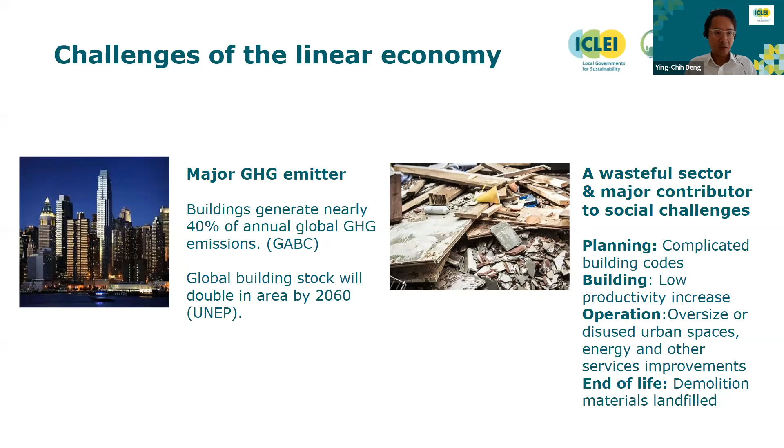So I would like to start with the challenges here. In relationship to the challenges we have observed, linear economy in the building sector follows a take, make, waste model. Resources are extracted from the environment, taken, used as disposable products, made, and discarded after their use periods, wasted. Linear economies are found to be linked to a range of negative impacts in cities, including rising carbon emissions, biodiversity loss, and waste management challenges.

The Circular City Action Framework was hence developed to introduce cities to a range of strategies and actions for circular transition at the local level. The action framework provides local governments with a 5R strategy and 15 linked actions.

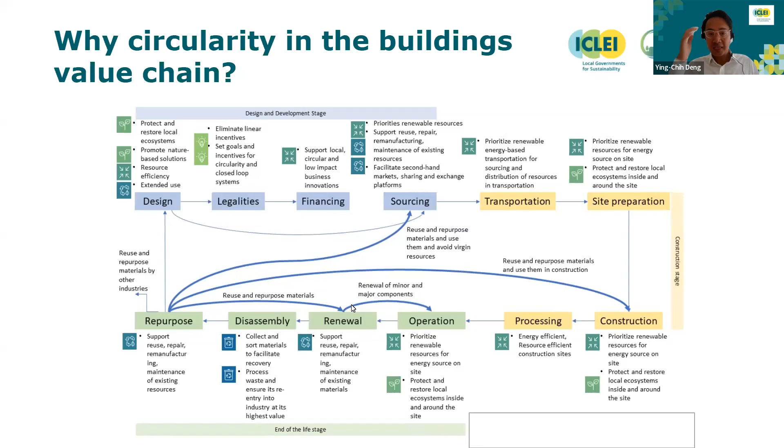Thank you so much, Ying-Chih, and thank you to the ICLEI team for having me today. My name is Katrina Brady. I'm Director of Strategy and Development at the World Green Building Council, talking to you today from London in the UK.

Thank you so much for those opening remarks. I will build on those, and it was fantastic to see details about the Circular City Action Framework. I was actually screenshotting it and sending it to my colleagues while you were speaking, Ying-Chih. That's a fantastic introduction.

I'll begin by introducing the World Green Building Council, who are, as you've heard, a global network of networks. We represent the 70 national green building councils around the world and their 36,000 members. Collectively, with our green building councils, we work to advance the ambition of the UN Sustainable Development Goals, the Paris Agreement, and to accelerate the critical systems transition that we need for sustainability at building, infrastructure, and city scale.

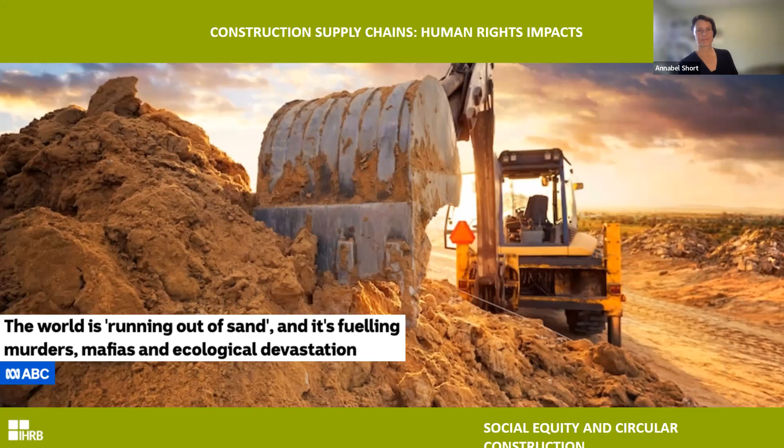And then when we think about wood and forestry, to elevate one particular dimension here, it's an area where workers in those industries are often out of sight, deep in the middle of forests, and often they're migrant workers who've come from one country to another. So what we see is rampant exploitation in the recruitment process, wage theft, and obviously very dangerous conditions, including conditions that are getting worse with the impacts of climate change in terms of forest fires, etc.

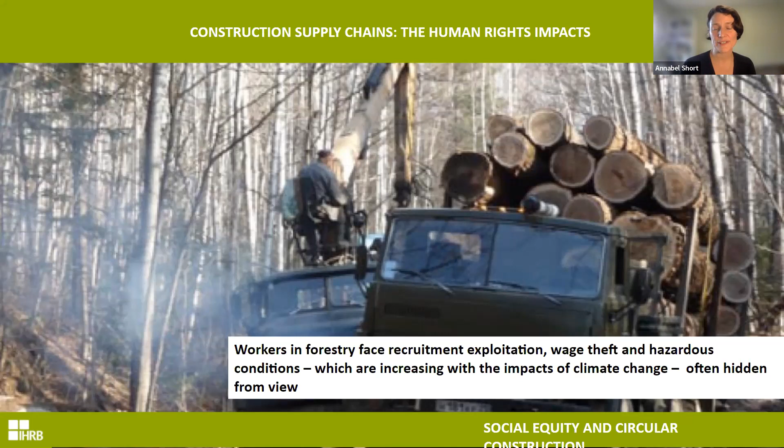And then the third material to hone in on is copper, which, as many of you on this call I'm sure know, is a key material that's going to be in more and more demand with the green transition, in terms of electrification of buildings, renewable energy infrastructure, and so on.

So I think it's so important in this context to think, yes, we need a green transition, we need to shift to renewables, but we also need to really think about shifting the economic systems to reduce material impacts at the same time. Some really striking statistics here from the Sustainable Minerals Institute in Australia: of the undeveloped copper ore bodies globally, 47% are either on or close to Indigenous peoples' lands, 65% are in high water risk areas, 65% are close to biodiversity conservation areas, and 50% are located in politically fragile jurisdictions.

And I've worked on business impacts and human rights for many, many years, and so I think it's just so striking that within the new green economy, many of the human rights dimensions through supply chains and on sites are just as applicable in the green economy as they are in the traditional economy.

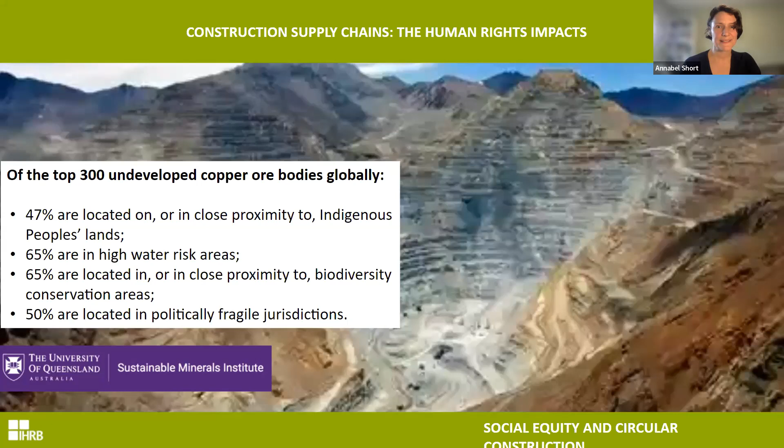So while that maybe painted quite a dark picture of where we are, and also the real need for action from a human as well as climate focus, it is encouraging that there's so much momentum underway. Katrina's presentation, for example, highlighting their upcoming initiative, which is really wonderful to hear about.

The big report that comes out each year on the status of buildings and construction globally really elevated this year the importance of reducing emissions from materials and construction processes. Here in the US, where I am based,

the White House announced a recent initiative to strengthen building performance standards involving 33 local governments throughout the country who are committed to reducing emissions and materials use in the built environment, which is great.

In South Africa and many other countries, there's thinking about what their just transition process should look like to move from high emitting to low carbon economies.

In the South African one, for example, it was interesting that while the focus was on the shift away from coal, because that's so important in that country, it highlighted also the need for coal producing areas to start developing new economic hubs around different industries, including the local generation of building materials supplies.

So huge amounts of opportunities in thinking through the ways that different sectors will be impacted by the transition and ensuring it's a just one.

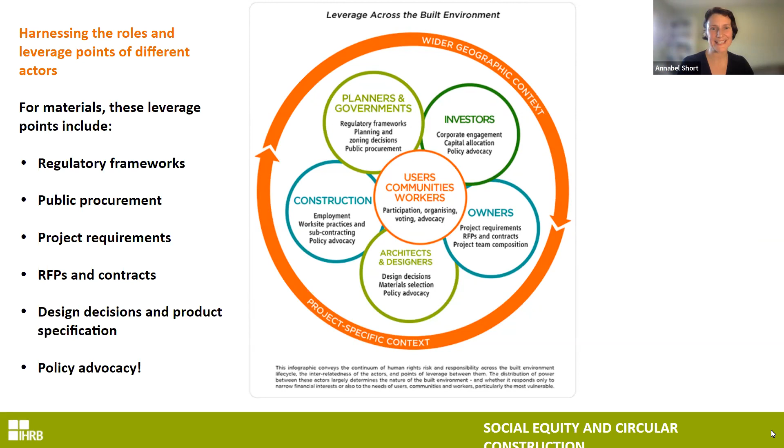I put policy advocacy down there at the bottom because I feel like everyone who's involved in this space can be engaged in different ways, collectively and individually, in policy advocacy. Next slide, please.

In addition to putting our framework into practice at the policy level through advocacy and engagement with different actors, we're also doing so at the level of specific projects. This is a project in Norway, very much in line with circularity in the built environment, where a former teacher training center is being reconverted into a center that the city uses to provide services for newly arrived immigrants and refugees.

I should also highlight that the city is a human rights city. I don't know if there are other human rights cities on this call, but many cities globally have chosen to designate themselves as human rights cities, and Bergen recognized that one way to put that commitment into practice is by integrating a human rights approach throughout the life cycle of a building project.

So they've taken our framework and are using it to influence decisions around participation, design, the use of the building, and how spaces will foment more interaction between people who are there to use the services and the local communities through the space of the building. It's pretty awesome to see how it's changed hearts and minds amongst the project team involved in that project.

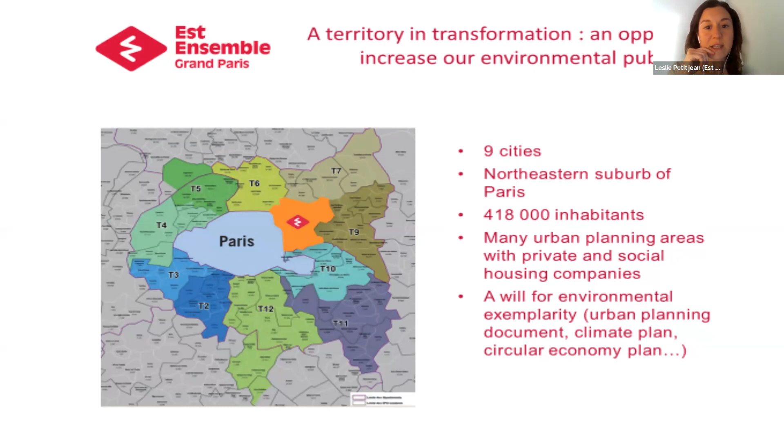So actually what we conducted, as the first milestone of the strategy, was an urban metabolism study that we focused mostly on building materials. I think most of you are aware of what an urban metabolism study is. It's like considering the territory as an organism with flows coming out and flows coming in, and actually considering the territory as a mine, an urban mine, where we can take resources. The goal is to measure our dependency on external resources and how we can minimize this dependency.

This will be produced according to the different demolition programs we have on the territory. And to rebuild according to our program, we will need 3 times more resources and materials. What we imagined when we started this study was that there might be an equivalence between what we will produce as waste and what we need as resources. But we can really see that we will need more materials, and we know there will be some tension about how we can provide all these materials.

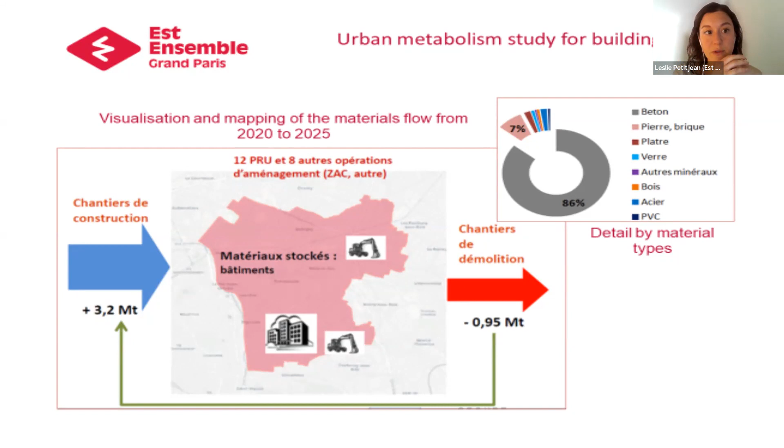So for this, we have 3 main actions and axes. The first one, central for me, is how we develop supply chain equipment for storage, because the problem of storage when developing a local supply chain is really central.

For example, if you have a demolition site in a city that will be demolished in February, and you want to reuse the materials in a construction site in May, you have this time gap in between. The main question we always face is where do we store the materials and how can we refurbish and transform them to reuse them on a construction site.

This is central because this is a really dense territory — there are a lot of projects coming up and a lot of tension on the land. It's also not always well perceived by policymakers to have this kind of equipment in the territory. We like to talk about logistics and supply chain, but when you talk about relocating industry, we know from an environmental point of view that this is really important.

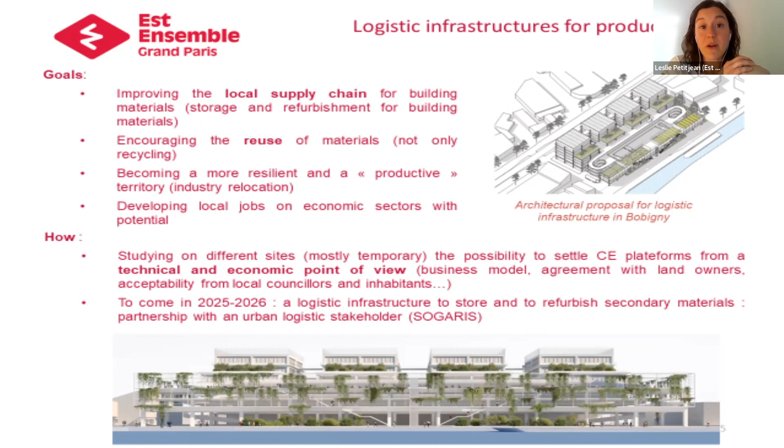As I said, it's really central for our strategy. This is one of the examples, but we also want to develop, like this one is a long-term project, but what we also try to do is identify some other lands, like temporary land as well, which can host this kind of project. As I said, we also want to help business and companies to stabilize their business model. So I work closely with my colleagues from the Economic Development Department on this topic.

This slide is about a project I think it was important to focus on, which is actually the most advanced project we have on the territory, because it demonstrates how we can concretely reuse materials at a really local scale, in a local neighborhood which is in renovation, and how we can develop partnerships with stakeholders to reuse materials. This is a project we're managing with a social housing company called Seine-Saint-Denis Habitat, which is the main social housing company in the department.

The project is currently underway, the demolition site has just begun last month. We will cut some walls made from concrete. Some of the walls from the social housing company will be cut, and they will sell this material to us, to Est Ensemble, because we will settle this paving stone on the future public space in the neighborhood.

Our role is we will buy the materials, we will transfer them, and we will store them on a local platform in the heart of the neighborhood. What's also important in this project is that the platform where the paving stone will be stored will also be a place for workshops with the inhabitants and citizens in the neighborhood, to raise awareness about circular economy topics.

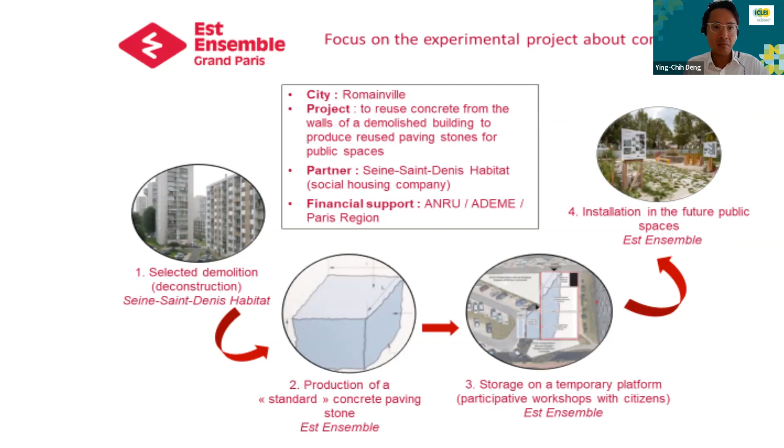It's not only a material flow analysis management, it's also kind of the whole tools and initiative you develop around that. I agree with Annabelle. We have observed some cities in the USA have very similar approaches and projects. So in the future, we will be happy to facilitate maybe conversation among you guys.

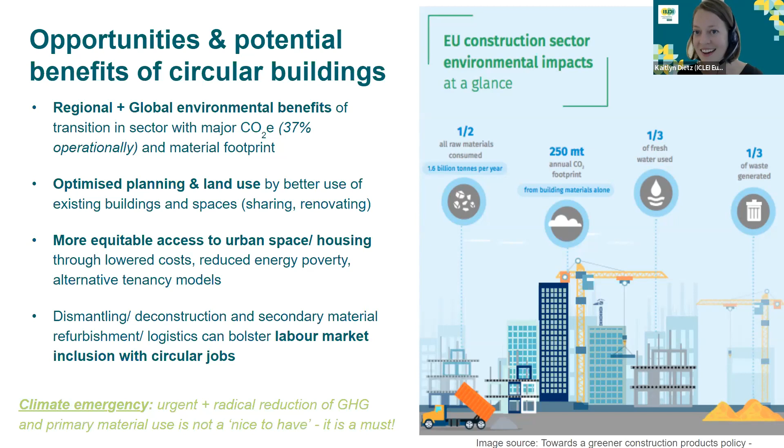So there's a major shift in thinking that's happening from the traditional view that green building means energy efficient HVAC and good windows. We have to really broaden that now and think about whole life carbon in a way that involves people from the value chain from beginning to end, and starting very early in the planning stage. So there's a shift in the whole mentality of architects, engineers, designers, and contractors. When we think of embodied carbon, it changes the way you choose materials, it changes the way you choose the design and construction system.

Then there's the huge logistics challenge that Leslie has also spoken largely to with this hub initiative of Est Ensemble. So there's a need for storage. There's a need for knowing that there is a solid demand for the material that you're selectively demolishing, because otherwise there's simply not a real savings in terms of cost for the storage and logistics around it.

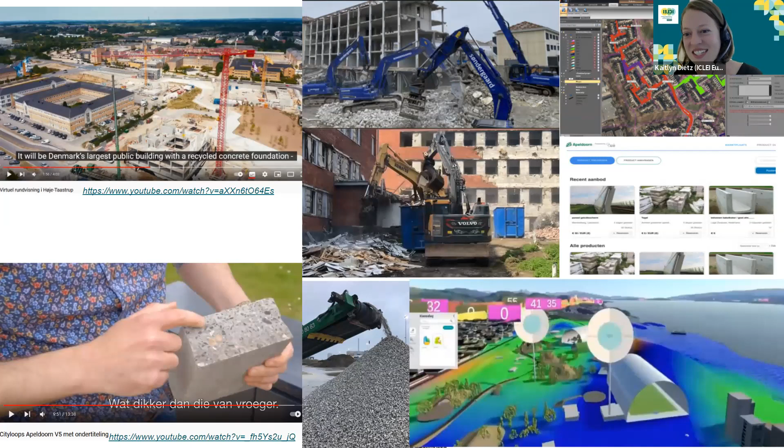Yeah, there's a lot going on here, but you can see a lot of selective demolition going on. You can see in the top left the new town hall site in Høje-Taastrup. They did a demolition of housing blocks, which you can see in top center, and salvaged 10,000 tons of concrete that was crushed and then used to make the largest public building with a recycled concrete foundation in Denmark.

You can see also some digital tools being used. The one in the bottom right is from Bodø, with their mapping of contaminated masses on the old military site, and the adaptive reuse of a hangar building to make a football pitch. And you see in the middle right a marketplace, a digital marketplace to match supply and demand of secondary materials used in Apeldoorn. Next slide.

So there are six cities piloting innovations here in City Loops. What to highlight here in Roskilde, Denmark, for example, this is in the Copenhagen capital region. They have an old concrete factory in an area called Musicon, and they're keeping a lot of these old concrete structures as architectural heritage and as a place for a lot of experimentation. And they have a warehouse hall where they've used CO2 footprint calculations to be able to make the argument up the chain of decision making, to prove the case for why keeping the structure intact as far as possible is the best possible solution.

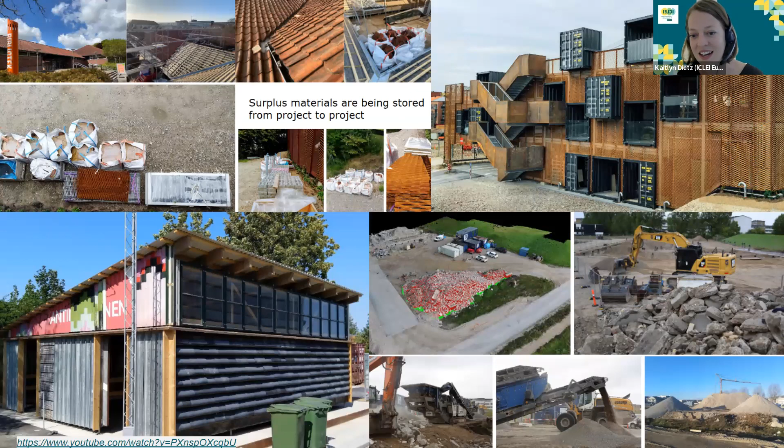Next slide, we have a few more pictures. Yes, so you have on the bottom left resource sheds that are bike storage facilities between the housing blocks at Musicon, using secondary materials that were harvested there on the site. Or you have, in the top right, a new parking garage that was built with facade materials coming from secondary sources as well.

And they're doing interesting soil balance initiatives also in Roskilde, where they predict several years in advance what will be the construction activities, what are the big urban developments foreseen, and how many tons of soil can we avoid excavating and moving from side to side around the city. And using this excess mass, for example, within the same Musicon site, to make landscaping, but also climate adaptation in areas that are prone to flooding. Next slide.

So in summary, here I will present what we understand to be the keys to success, the key strategies to bear in mind for local authorities facing circular construction and wanting to get started with this topic. First, the most important point to reiterate is to avoid demolishing what doesn't need to be demolished, and to renovate everything that can be renovated. This aligns very much with the renovation wave being pushed in Europe now, so there are great examples and arguments for adaptive reuse of existing structures, which also has benefits like preserving cultural heritage and the character of neighborhoods.

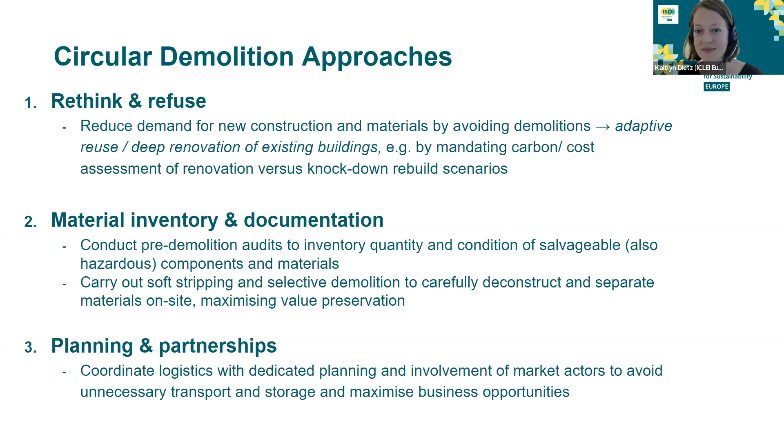Then on the renovation and construction side, we have the need to really start early with what our ambition is going to be. It's also imperative that you don't specify a building made of a certain percentage of a certain material, because you need to leave it open to professionals to innovate. You have a lot of certifications and building standards that are also potentially stifling innovation when it comes to materials that are not certified, like secondary materials might be.

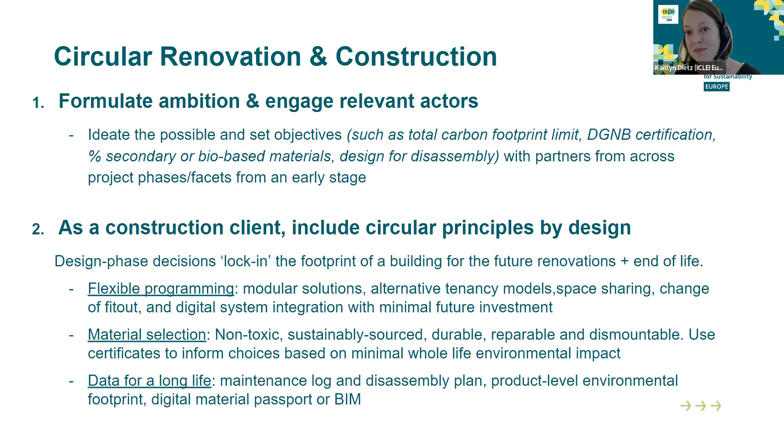It's really key to move beyond asking for lowest price. This is still really common in public authorities today, that we get lowest price tenders. We have to consider the whole cost of ownership, the whole life carbon, and think about the other things impacting us beyond our pocketbook. It's also really important to consider the roles and risks of different actors in the construction sector, because this can shift greatly.

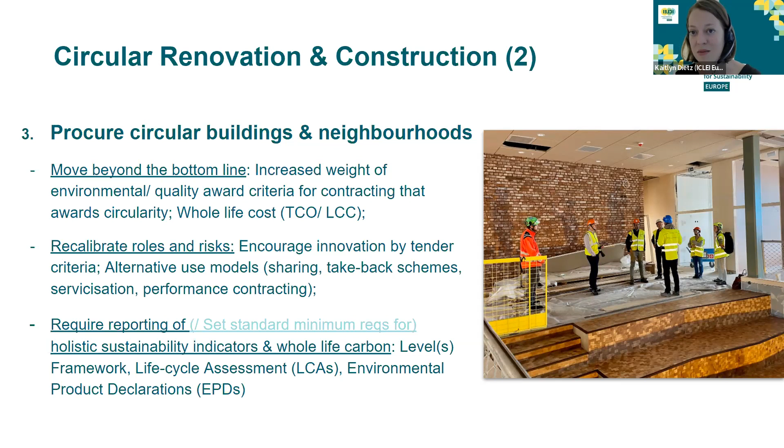Also, because it's a very risk-averse and conservative sector traditionally, it's important to consider and negotiate these things from the beginning. And of course, there are many ways to get the data and use life cycle assessments and standards that can help you understand the picture, so you can have a fair comparison of whole life impacts - social, environmental, carbon, and so on.

I don't think I have the time to finish going into these, but there are many examples here to share of other ways that local authorities can take the lead. I think Leslie summed them up with an example for all three of these very well.

Yes, again, I'm afraid we really just don't have the time. I would just say these lessons come from working with many cities, and you have here in the slides lots of further resources. I will stop there.

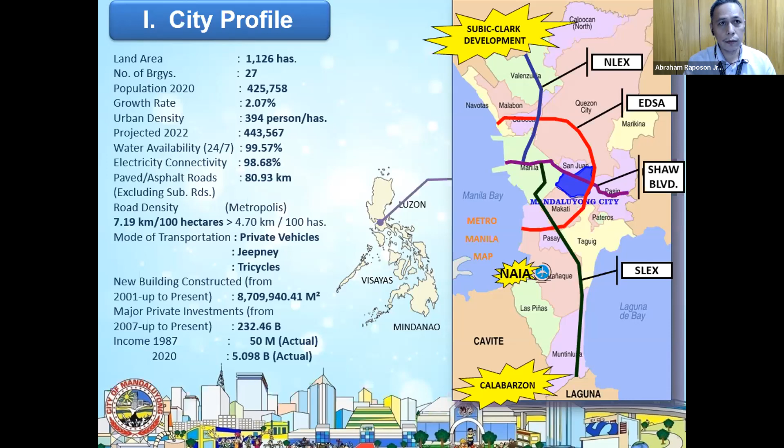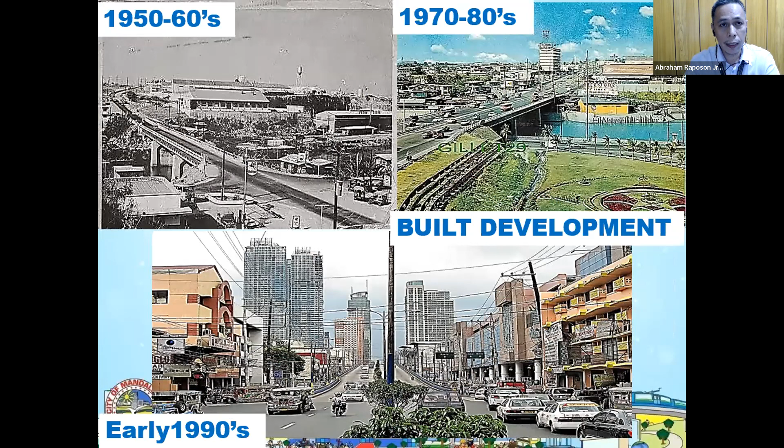So these are built development, as well as development of the city government, and infrastructure connection within our city, because the central location of Mandaluyong is in the core of Metro Manila, which is the capital of the Philippines.

This leads to the present situation where the built environment is already on the urban sprawl, where Metro Manila is already a mega region comprising different localities.

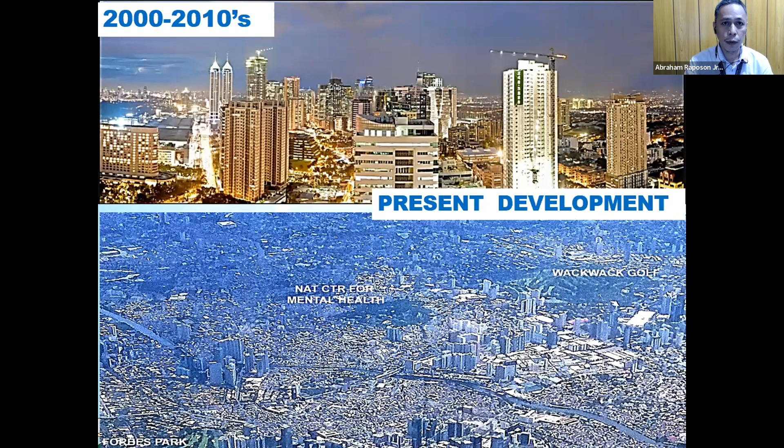So the location of Mandaluyong is central within the capital, where our limited space must accommodate the development of the built environment.

So recently, Mandaluyong acquired the certification of registration for ISO 9001, for our commitment to improve the services and delivery to our stakeholders.

So with our mission and vision established in the institutional management of all frontline environmental services, and the importance of collective action of the people in meeting our mission and vision, to be a world-class city in a well-planned, sustainable environment where we nurture global standard competence and visionary leadership.

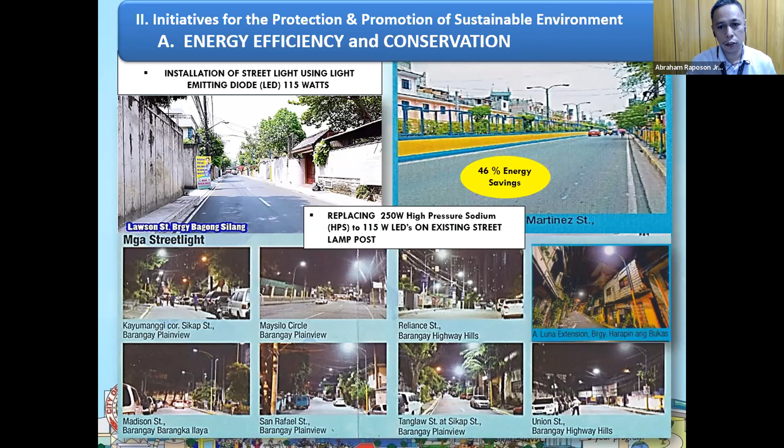So with our initiative, we started replacing our streetlights to reduce the energy load of the city, as energy efficiency and conservation is our main task. These measures and programs contribute to climate change mitigation and conservation, and to other available institutional arrangements that will be formalized.

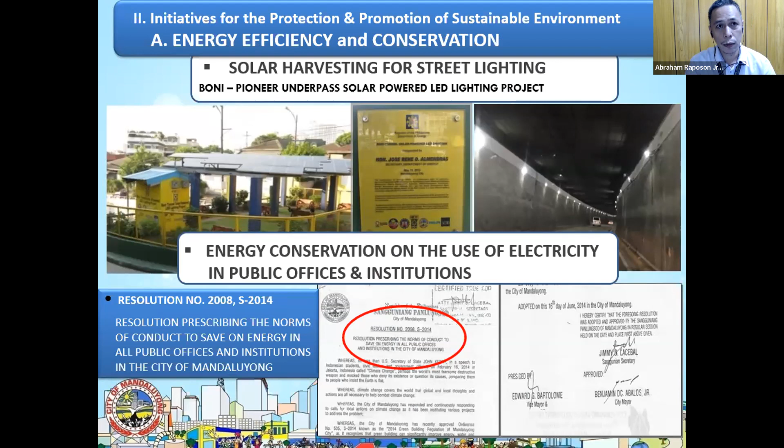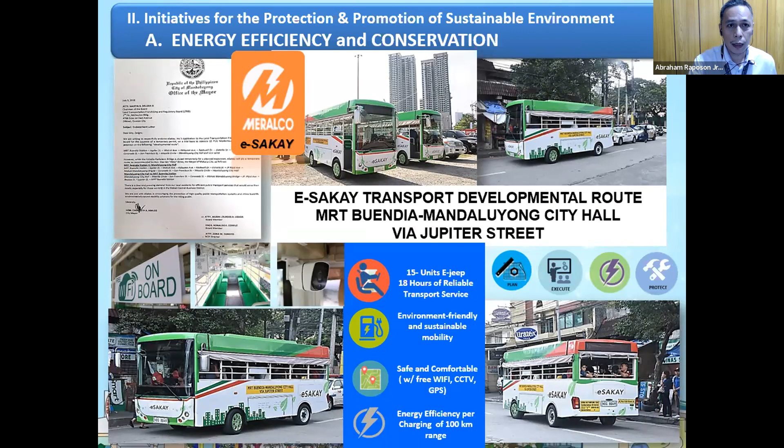This measure involves tapping into services and contributing to the efficiency of transport, as well as shifting to electric vehicles where we can serve our metro stakeholders.

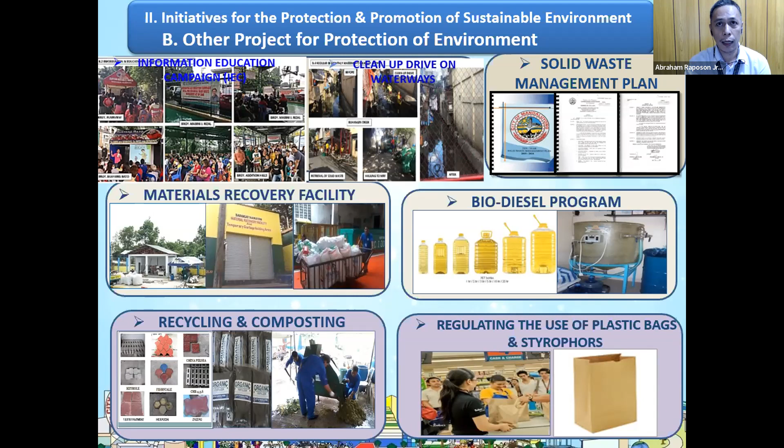So these measures focus on environmental protection as well as the health of the city, including managing our waste through MRF (material recovery facility), the use of available materials that we can recycle and reuse, regulating toxic materials, a plastic ban in the city, and the management of the solid waste management plan.

So these measures also integrate the development of our riverfront development, encouraging an active lifestyle for the people, where they can commune with their communities and develop a sustainable lifestyle, because the lifestyle of people is important.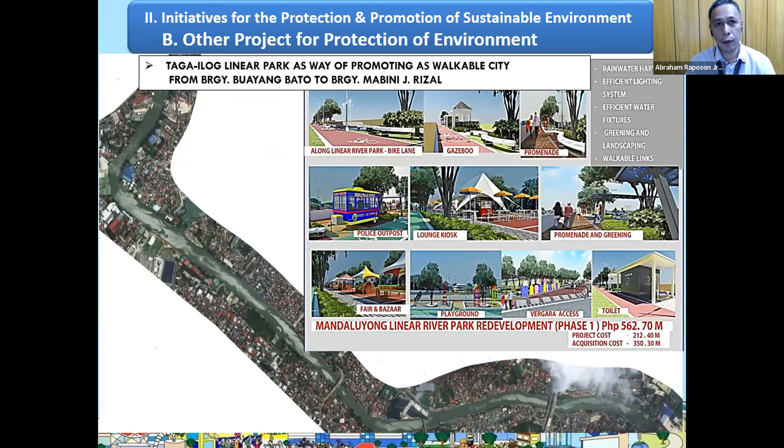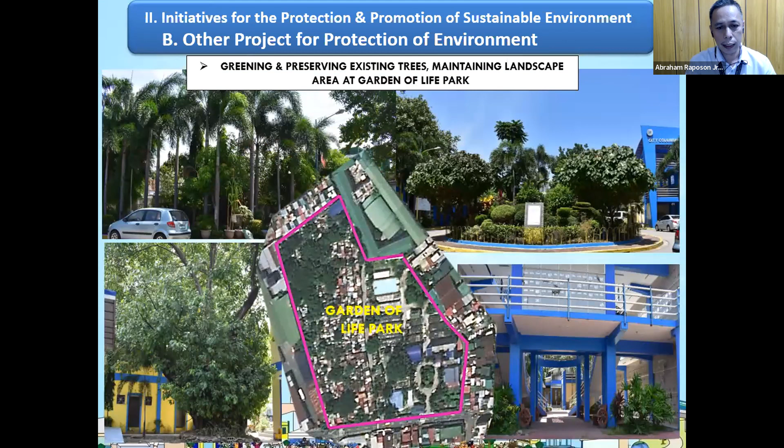So these are other projects for protection of environment, and then the development of our greeneries within the city park, and then common projects.

So to give you a brief background of our experience in formulating the Green Building Ordinance, since 2012 we have partnered with the International Finance Corporation, with a cooperation agreement, establishment of the ordinance, and market analysis of the existing materials in the market, as well as formulation of the Green Building Ordinance. These are the activities we held, and we appreciate the effort of our partner the IFC.

In visiting with the stakeholders, as well as engagement with the public in consulting their side in accepting this regulation. So come 2014, we adopted the Green Building Regulation of Mandaluyong, as well as these are our initial steps in contributing to the climate change problem.

So come 2018, we already have version 2 of the initial Green Building Regulation, wherein we expanded to cover more new construction projects to better meet the more challenging ahead in the built environment of our city.

So with this comparison from the 18 mandatory measures of the original, it expanded to 40 green building measures, wherein the coverage of these measures had been established, as well as introducing the building certification for new construction.

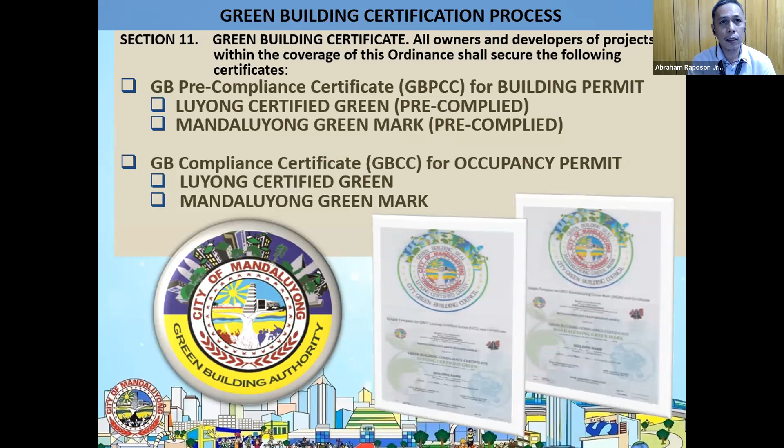So this measure and certification compelled all new building owners to secure their building certification and permit, wherein this certification is tied to the regulation of the Green Building Ordinance with the city.

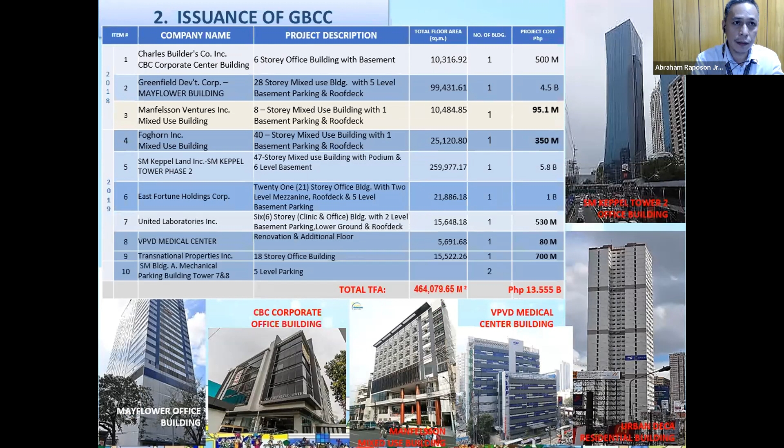Since 2014, we have already evaluated almost 3 million total floor area of new construction buildings within the city. We have issued the final green building compliance certificate for the occupancy certificate of new buildings, wherein all the measures integrated with their projects, sustainable environment, and green building measures have been validated on site. So with this, the ordinance of the City of Mandaluyong is very effective.

We have computed the projected annual energy savings from our database. So we have computed an annual savings of 50 million kilowatt hours for the 22 projects we have completed and computed.

This translates to energy savings that can power almost 120,000 homes with the computed projected savings, as well as fuel savings per year equivalent to the consumption of 5,700 cars, as well as avoidance of emissions per year equivalent to 13,000 cars.

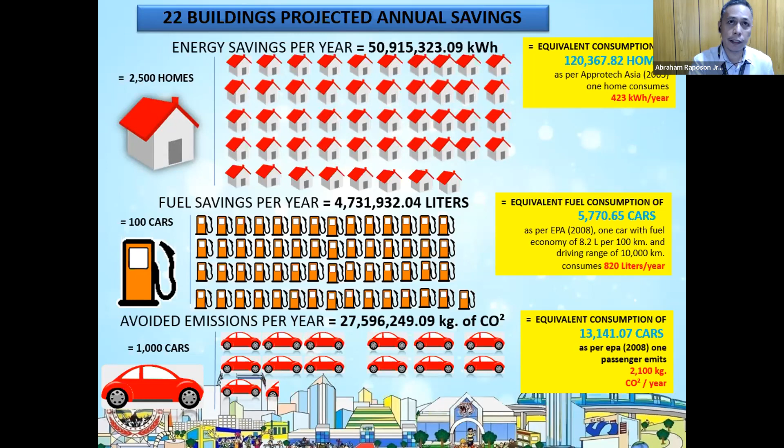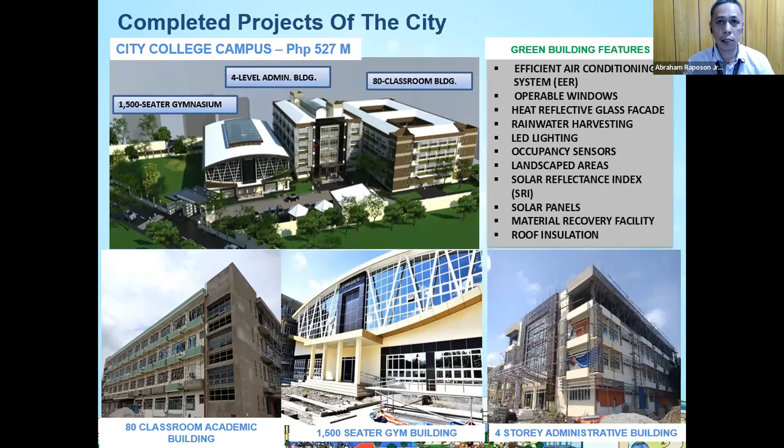So the city has committed to implementing our city projects, wherein all the applicable measures of integration to new buildings and maximizing the use of materials have been integrated into our city projects. These are a snapshot of the completed projects that the city's green building program has implemented.

So these are ongoing projects and pipeline projects. Currently we have new ongoing projects, the Mandaluyong Colosseum and Civic Complex, wherein all the applicable measures have been integrated into the projects, and it's on the construction stage, wherein managing the sustainable construction method has been put in place and directed to the construction team, and the project management has been monitoring it already.

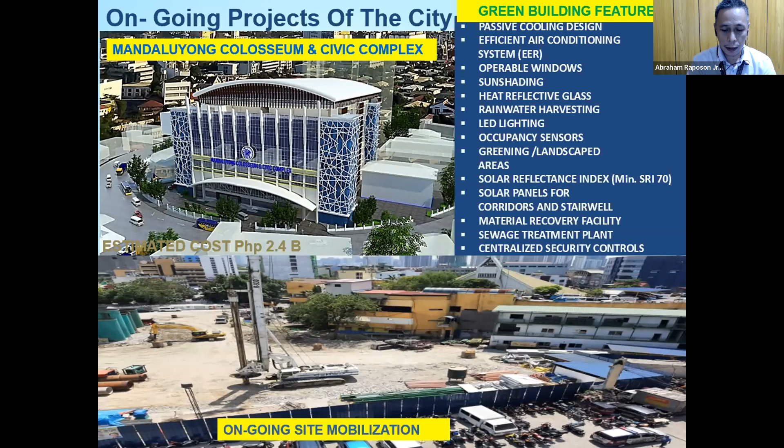So these are proposed projects of the city, integrating in the design passive cooling and available materials, as well as maximizing the orientation, efficient air conditioning, and integrating also the rainwater harvesting system, wherein we can tap and reduce the use of pristine drinkable water.

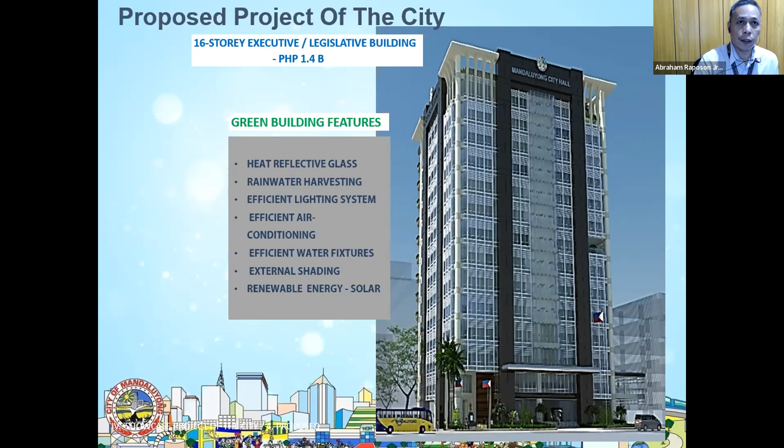So the city's next step, based on what was presented earlier by our presenter, it's an eye-opener for me that circular buildings and construction has become mainstream and is being integrated into new strategies for implementation in the local setting.

So we have already formulated for integrating the principle of circular building in the new version of the green building ordinance, and then engaging stakeholders for their proactive ownership, wherein they will be consulted. I can include the circular building principle, as well as list some formulated keynotes in reviewing recent implementation experience, as well as our experience with the pandemic and the geopolitical conflict. I think it can contribute to the built environment, wherein the supply of materials and the pressure of our economy can contribute to added costs, as well as the continuous improvement in implementing and monitoring this measure.

I actually have an idea in innovating and integrating one measure in our ordinance, which is the innovation type. As an architect, we can reuse recoverable materials on our site, which we can complement by reusing them into an artwork. For example, used rebars that we can reuse in artistic interpretation, or reuse in the finished buildings, or pictures of the projects, as well as the economic side and other sustainable measures.